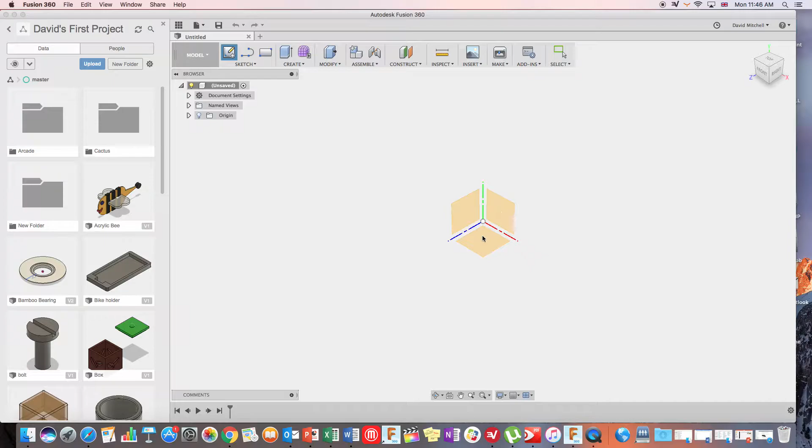Okay, so I've clicked on the bottom plane there. We're then just going to do a basic square to start off with. Okay, so I click on here. I'm using the 0 point. You can use any point you want really, and it'll automatically snap to certain points for us.

So let's just say we're going to do 50 by 50 millimeters. As you can see that says 50 by 50 millimeters, but what I'm going to do is take it down to 40 by 45.

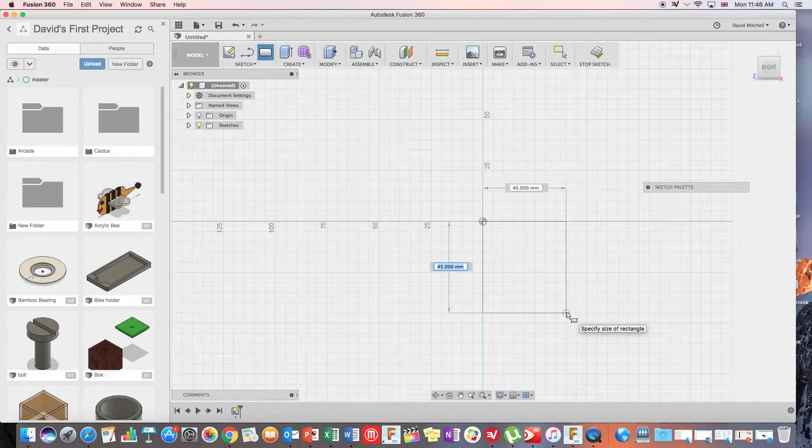Okay, and then from this I'm going to show the dimension tool. So say if we have this and the dimension didn't show up properly, or it wouldn't snap to the exact dimension you wanted, if you click on Sketch Dimension here, we can then click on the side you want, drag it away, and then click again, and we can edit that to 50. Okay, same with the bottom here, and then edit this to 50 as well.

As you can see, it's in millimeters, so 50 millimeters is 5 centimeters. Alright, once this is done, I then want to make this 3D, so I'm going to click on this extrude button here.

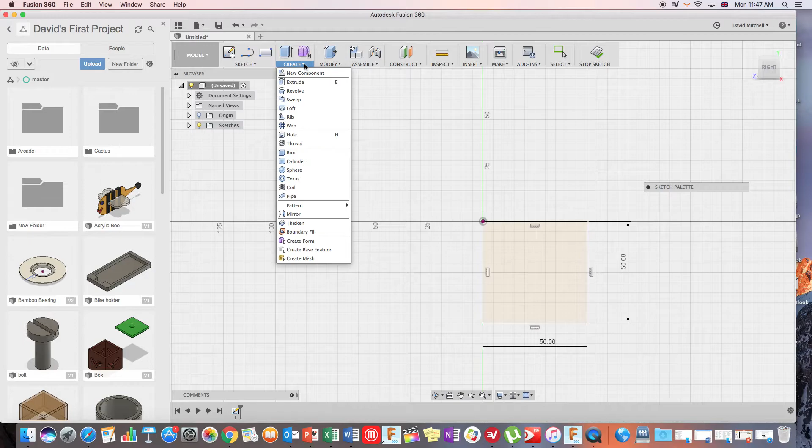There are a variety of other features, which we'll probably learn maybe one or two more of later on. But the basic extrude is all we want here.

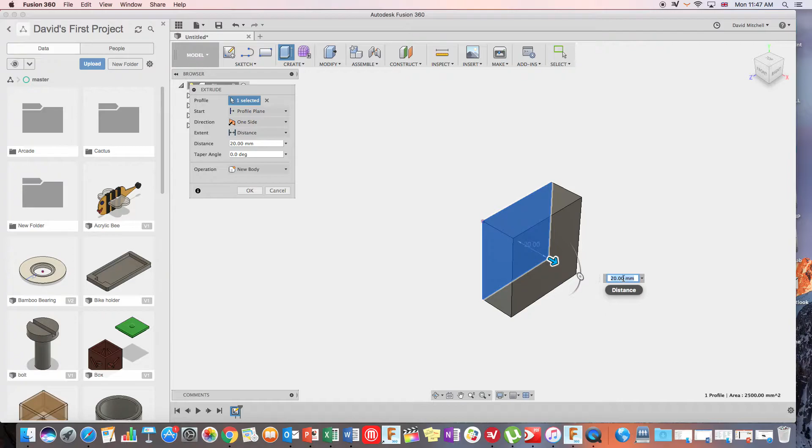Okay, so the main thing we need to select is the profile. This is the profile, the outside shape of it, and this is the shape we want to extrude. Now we can either click the arrow and drag it into shape, or once again we can use the distance that automatically comes up this time and type in 50 millimeters.

Okay, so instantly now we have got a cube that's 50 millimeters by 50 millimeters by 50 millimeters. As you can see, I can rotate it round, click on certain points to actually view it from specific angles, from the top, from the front, or I can go back to this isometric view.

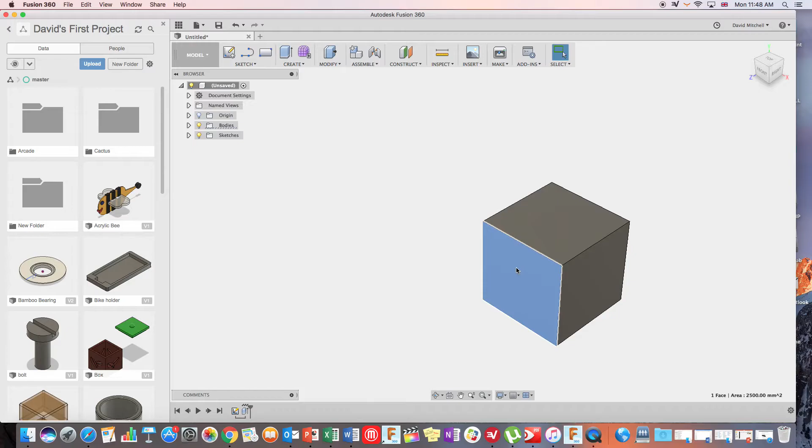Now what we're going to do is actually put a hole straight through the middle of this cube. So now I'm going to select this face. You can see it's turned blue. I'm then going to go down to the sketch, like the create, the sketch has more options.

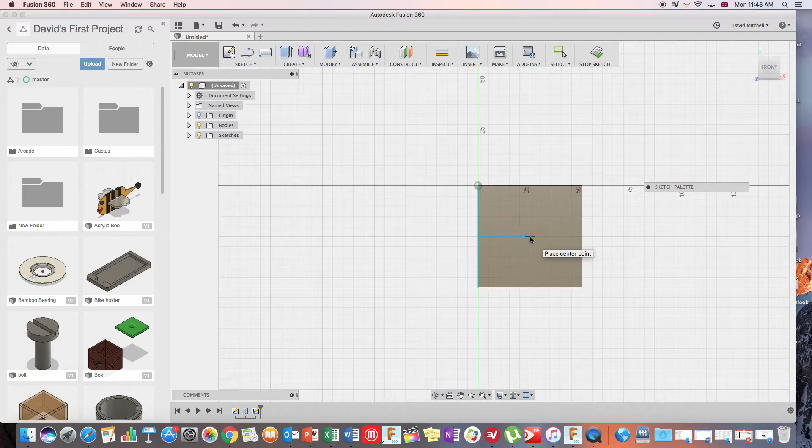So I'm going to click on center. As you can see, it's already come towards me and faced me. The center is already on here because we've done a 50 by 50 cube, which is quite standard. So I'm going to click directly in the center, and then I'm going to do the hole 30 millimeters in diameter.

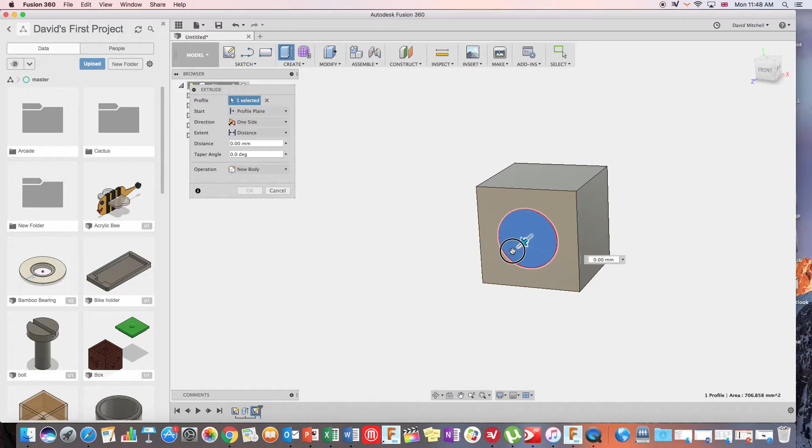Once I've got this hole, I want to make this into a 3D shape, but I want to extrude. The software is quite intuitive, so I've just clicked the circle. If I pull this way, it's going to add material. If I go the other way, it's going to subtract material.

So I'm just going to make sure this is all the way through the other side. That's 60 when we know our shape's 50. If I click on this now, I've got a hole going all the way through the material.

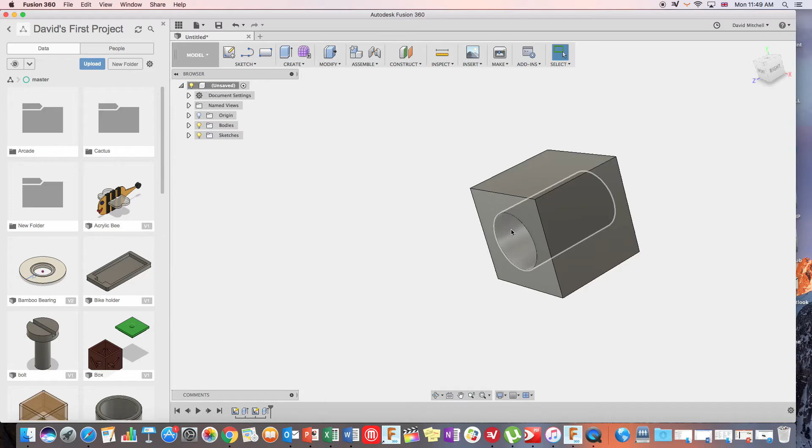We're going to repeat this process just so you get used to creating features. So once again, we click on here, we're going to do the circle tool again, center, 30, extrude button, click on the part we want to extrude, push it all the way through.

Okay, and then the last bit, we're going to do the top here. So I'm going to click on the top, sketch, circle, diameter here, 30 millimeters again. Okay, go up to extrude, click on it, and then just drag it all the way through.

Okay, so now we've got like a holy cube. What I'd like to do now is just round the edges off this cube. So we've used sketch and we've used create. Now we're going to use modify.

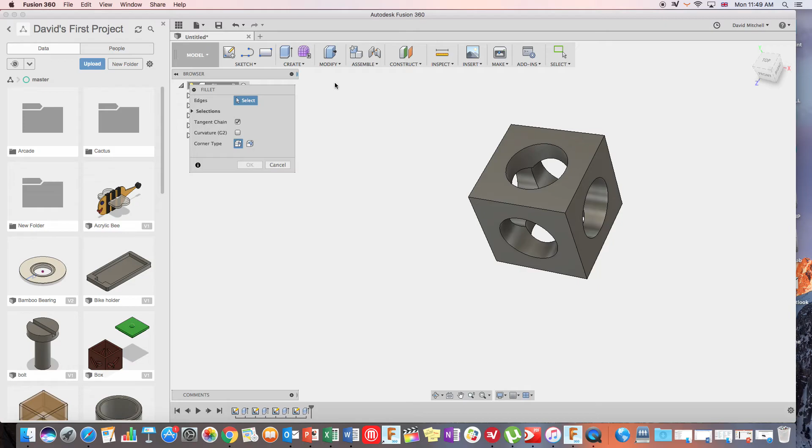So we click on modify, and we can see we've got this nice fillet. So we're going to fillet the edges, which rounds it off for us. We can actually select more than one edge at once. If we keep clicking the edges, it will keep selecting them for us.

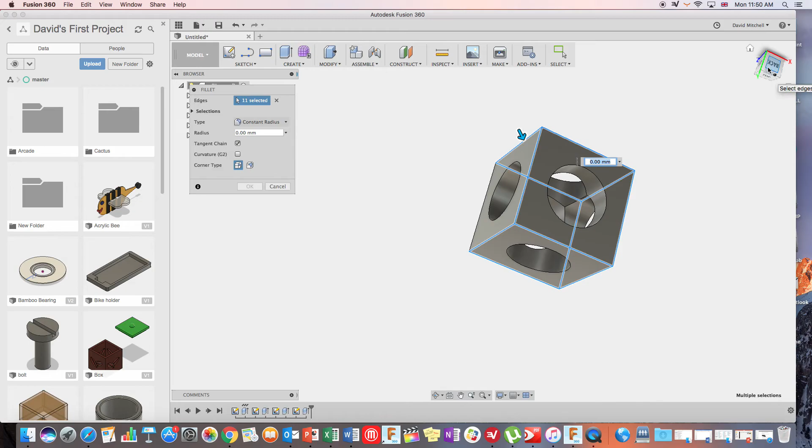So I'm actually going to move the work around a little bit more using the cube at the top over here, and I'm going to continue clicking so I have all the edges selected. So now I've got all the edges selected.

And then we can change the millimeters here, on the radius, or we can change it here. I'm just going to go to this one this time, so I'm going to do this one 5, and then it gives us a preview. Yep, okay, 5's pretty good.

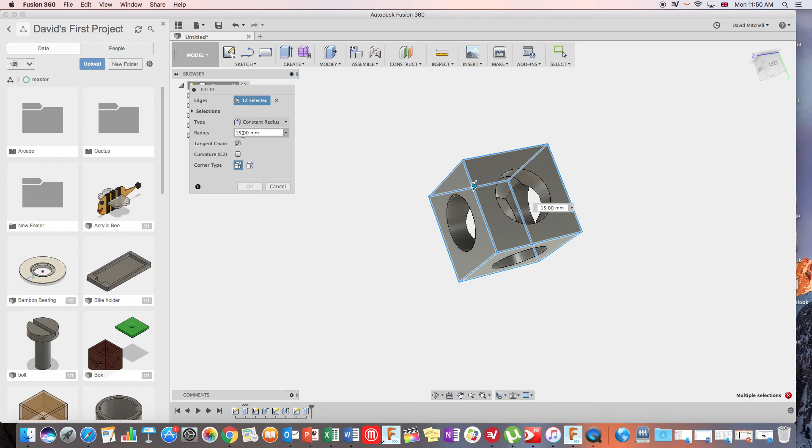If we do too much, it comes up with the error that we can see down the bottom right here. So it will only let you do what it thinks won't actually distort the actual product yourself. So 5mm is good, I'm going to click OK.

Okay, and now I have a nice holy cube, which has got rounded edges. We could actually round these as well, but that's just an extra activity.